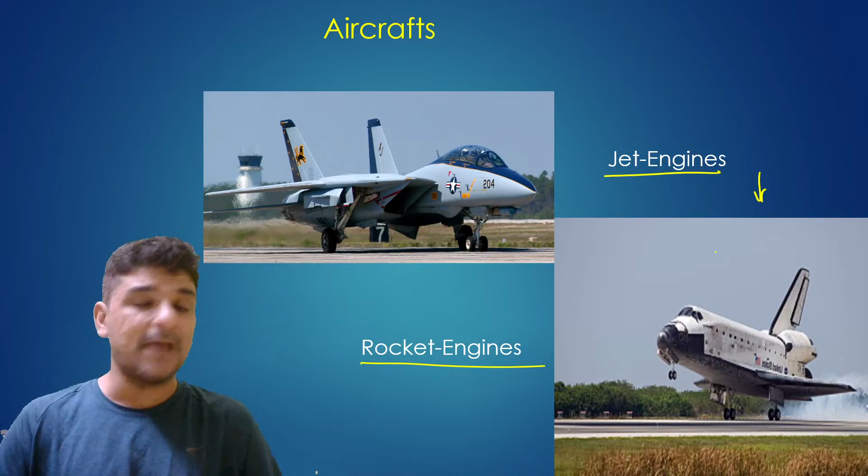Now let's go to the next section, which is why aircraft engines are required. If you have an aircraft, what is the need of an engine, how we actually design these engines, and what are the different components.

First, let's see very basic why the aircraft needs an engine. To understand this, let's take a simple example. Let's say you have a paper boat. I'm sure all of you might have played with this boat when you were young. So if you place this paper boat on water, what will you see?

You will see that when the water is still and you place the boat, it stays at the same location. Now if you want to make this boat move forward, what generally do you do? You push your boat from behind. Let's say you have your hand, and then you push this boat. The moment you push it, the boat moves further. This is a simple example that you might have done.

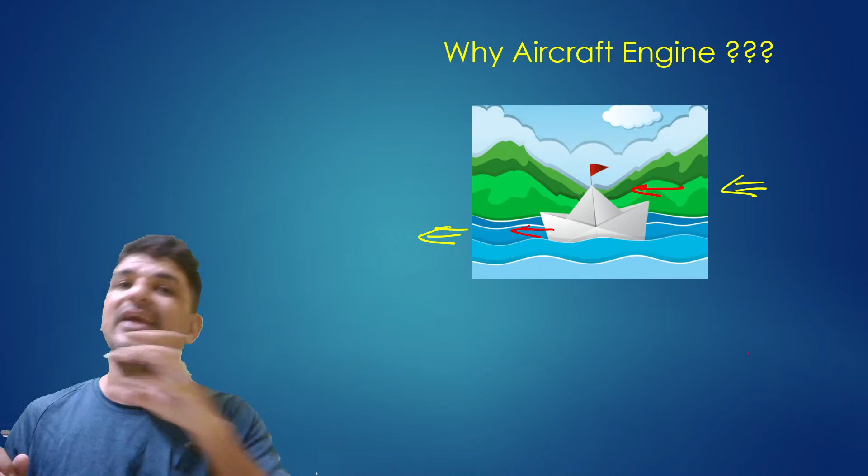So whenever we want to propel this boat forward in the water, what do you do? You apply some force from behind. I'm sure you all are engineering students and have some knowledge about force. Generally, you need some force to move things further.

This can also be understood by another example: there is still water and you put your hand inside it. Now if you want to move your hand forward, what will you do? You have to apply some force on your hand. So generally, to move things through a fluid, we need some force.

I'm sure you've got some idea about force now. So if there is an object that has to be moved through water, or through some other fluid, you have to apply some force on that object. The same principle is used to propel your aircraft.

Let's take another example. Say you have water, and in that water there is a fish standing at one location. Now if the fish has to move through the water, if it wants to go forward, what will it do? It will try to push or propel itself through the water by movement of its tail. This is the tail that is moving.

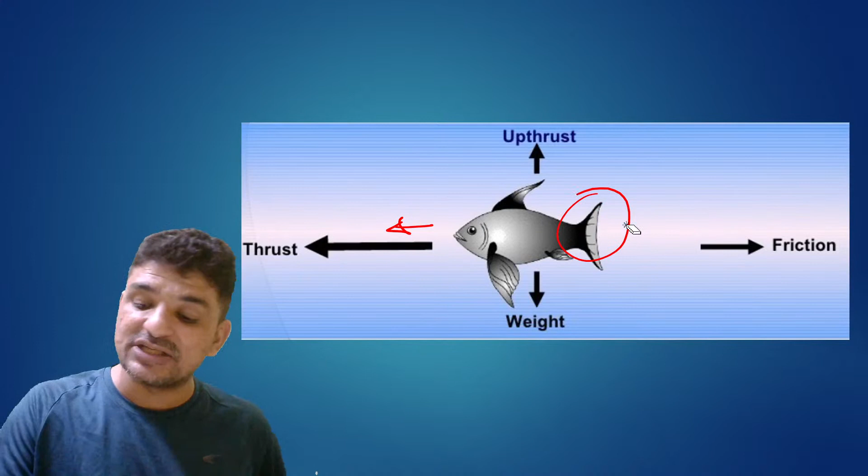So when that tail is moving, it is actually pushing some water behind. Some water is pushed behind, and in that process, some thrust is exerted on the fish so that it moves forward. So whenever a fish is moving, it throws some water behind, and in turn it gets some thrust, and because of that thrust it moves forward.

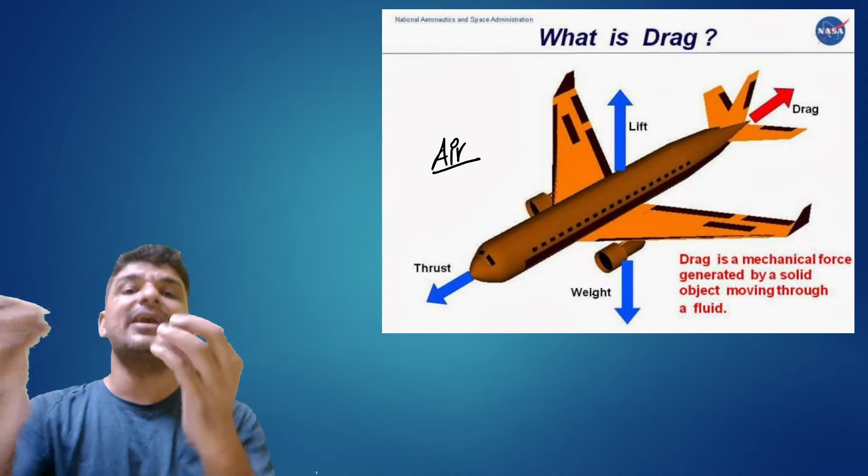The same principle happens with your aircraft as well. If you see a simple aircraft, it's nothing but an object that is moving through one of the fluids. You have air which is present throughout your space. Now your aircraft is moving forward. When the aircraft is moving, it is an object moving through the space or through the atmosphere, so it needs to be applied with some force.

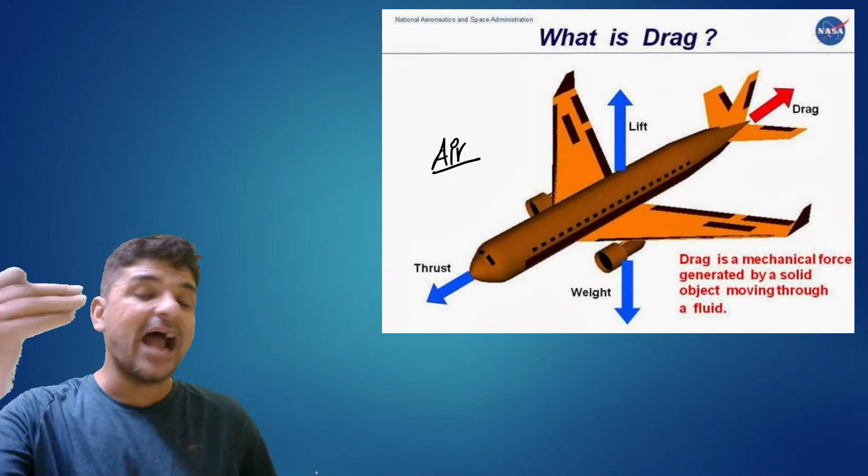That force is nothing but thrust. Why is this thrust required? Because when the object is moving through the fluid, there will be some frictional drag acting on your aircraft, caused by the air. To overcome this drag, we need some force so that the aircraft can move forward.

So this is the basic principle of how an aircraft actually moves forward. You apply some thrust on this object, this plane, and it will move forward. This thrust is used to overcome the frictional drag acting on your aircraft. So guys, this is a very simple principle.

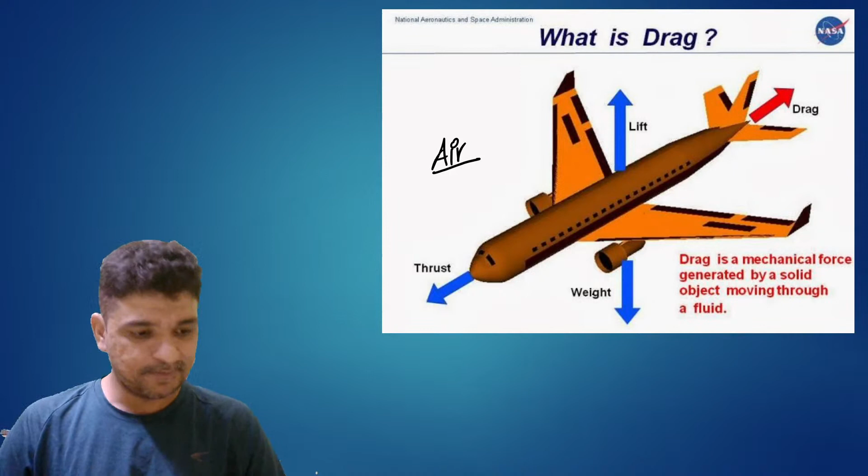Now, how thrust is generated, how engines generate thrust. To understand this simple concept, probably you might have heard Newton's third law: every action has an equal and opposite reaction. So the same principle is used by your aircraft engine as well. So we have your engine - let's say this is one of the engines that you have.

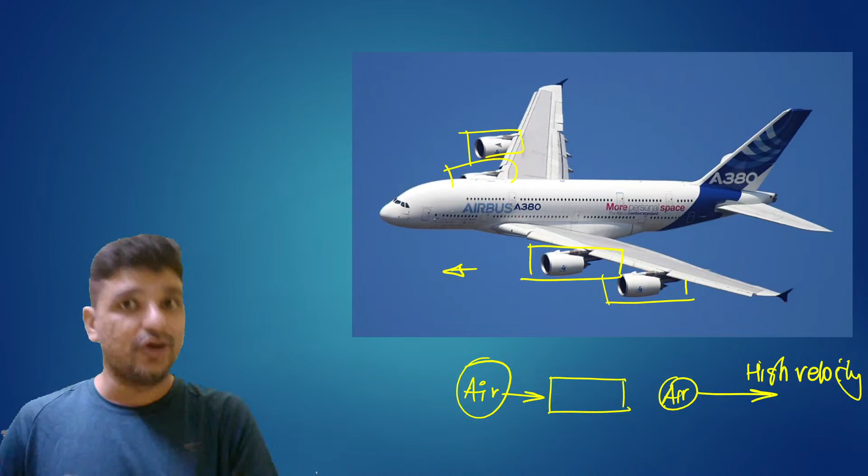This engine is going to take in some air from the front, draw it in, and throw that air out with high velocity. I'm sure you might be aware about Newton's second law and Newton's third law. Whatever is the value of thrust generated - 50 kilonewton, 100 kilonewton, whatever it is - that value is decided by Newton's second law, and the principle of action and reaction is decided by Newton's third law.

So the air, having very low velocity u, roughly around 0, is accelerated while passing through the engine to some very high velocity v. When this air gets pushed towards behind, there was some force applied on this air so that it starts moving backward. That same force was applied by your aircraft engine, and since the air was applied with force, this air in turn is going to apply the same force in the forward direction to your engine. This is how your thrust is actually generated.

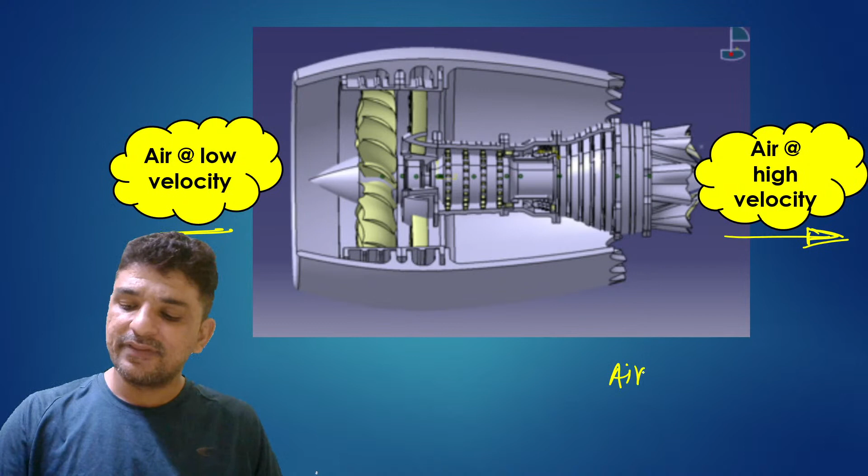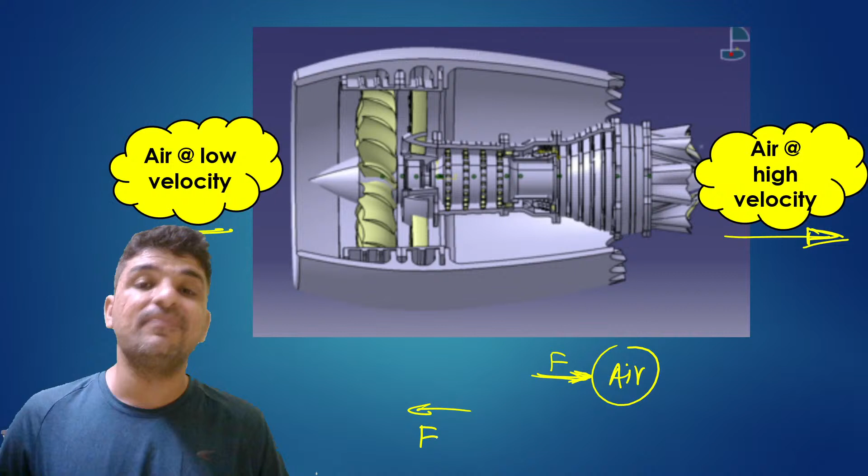If you see your engine, in the front you have air which is at very low velocity. That low velocity air is going to pass through your aircraft engine and come out at very high velocity. So if you see on the air, there was some force applied in this direction, because of which it has got accelerated - that force was applied by your engine. Now from Newton's third law, the action and reaction law - when your air is getting some force from the engine, the engine is also going to get some force from the air, and this force is actually called thrust. This is how thrust is generated by your engine.

Now we are going to see how you actually generate this thrust, and what are the different components present inside your engine, and how we design those components. I have also put up a diagram explaining how the air moves through the engine. We have air in the front coming inside the engine. While passing through, the engine is rotating, and as the air passes through and comes out at very high speeds, thrust is generated.

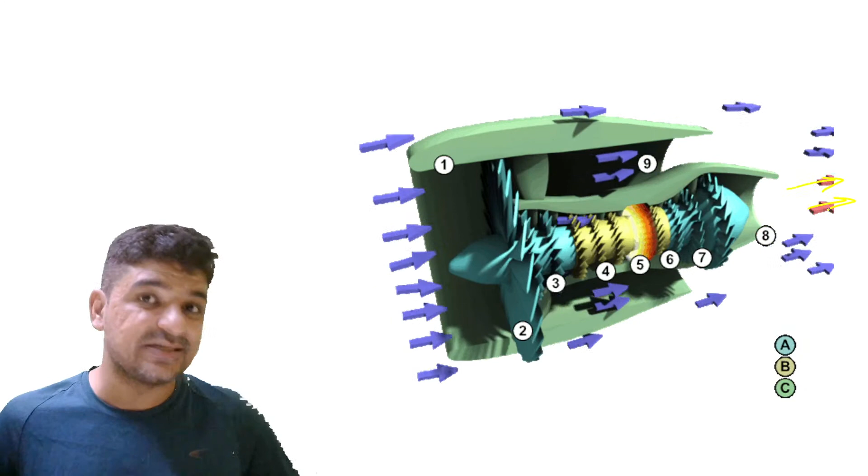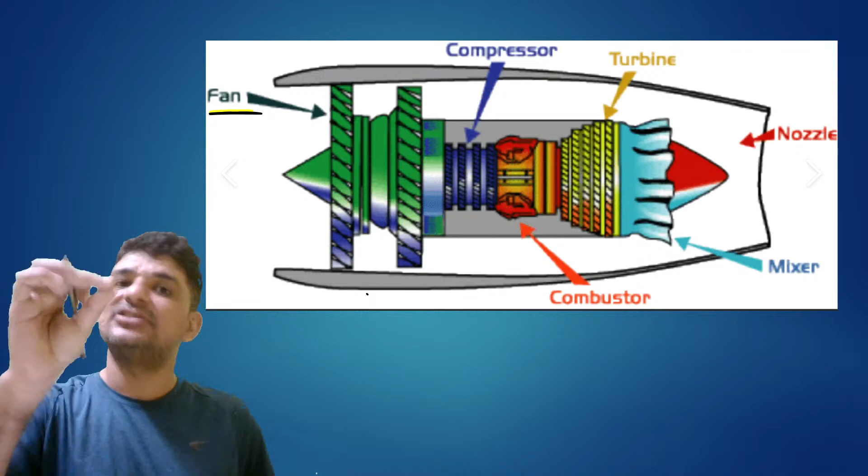Okay guys, moving on, let's take a look at the different components which exist inside the engine and how these components are actually designed. If we see an aircraft engine, probably a jet engine, the components look like this - this is a cross section of the engine. In the engine, we have a fan placed in front, which is used to accelerate the air. The air propelled behind is accelerated by your fan. Then we have the Brayton cycle components - in the Brayton cycle, you might have heard about a compressor that is used to compress and increase the pressure of air.

Then you have a combustor where fuel is supplied and burned, and energy is released. That energy is taken up by the air, increasing its temperature. Once that high temperature, high pressure air passes through the turbine, it expands and does work.

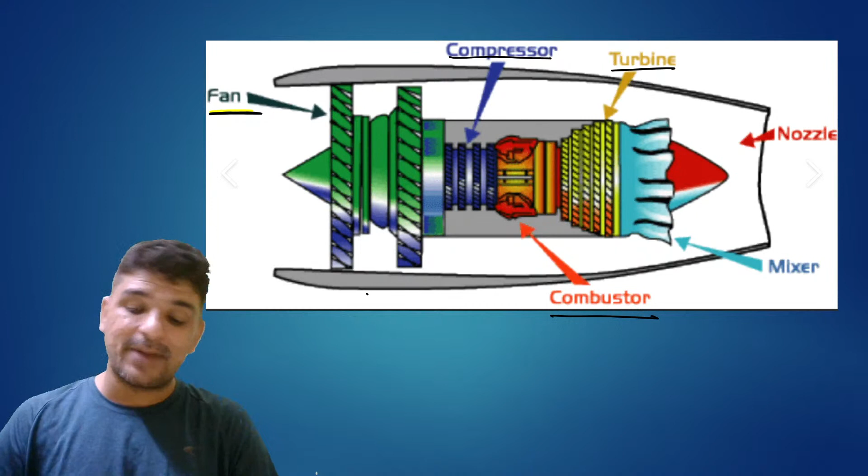The work generated by the turbine is used by the compressor and fan. Whatever work is generated by the turbine, 40 to 50% of that is used by the compressor, and the remaining 50 to 60% is used by the fan.

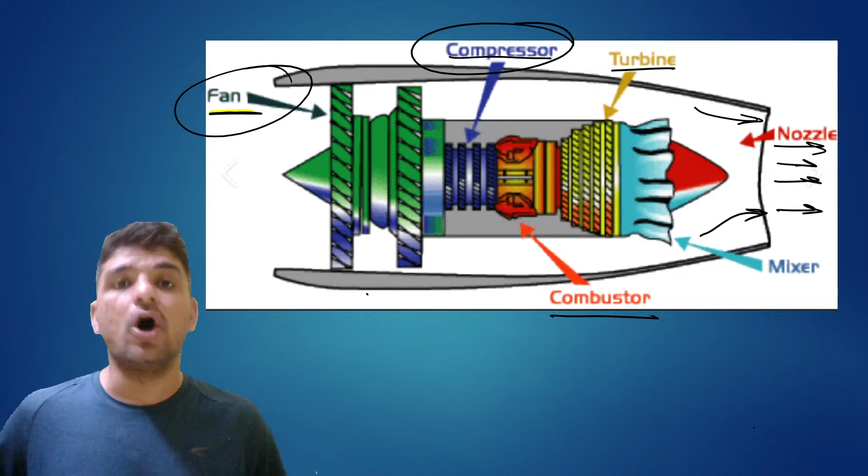Once the air coming out of the nozzle moves backward at high velocity, this is how the actual jet engine or aircraft engine generates thrust. These are the components present inside an aircraft engine.

Now let's go into the detailed design, how actual design happens. If you see the aircraft engine or any engine that goes inside an aircraft, there are certain specifications required for that engine. Engines are actually decided by these specifications, so let's see what specifications are required for an engine.

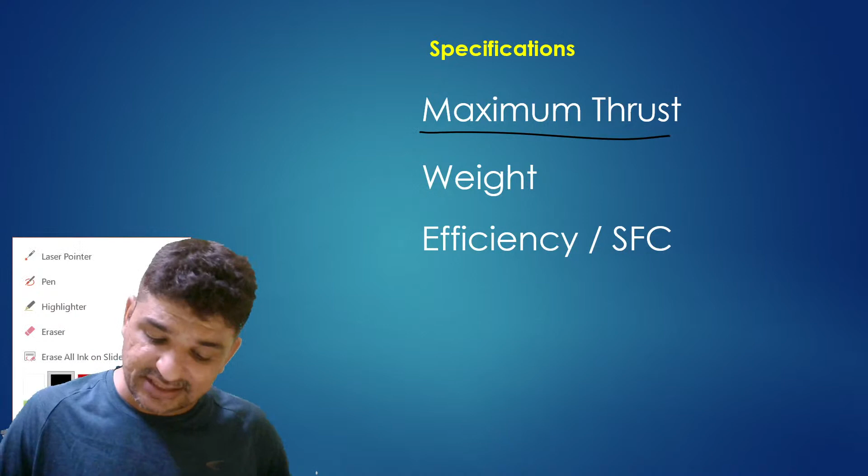The first and foremost, most important specification an aircraft engine needs is the maximum thrust it is going to generate. Based on that thrust, the aircraft is going to move forward. Whenever any engine is fitted on an aircraft, the first and most important criteria is the maximum thrust it will generate. This is the most important criteria which decides your engine.

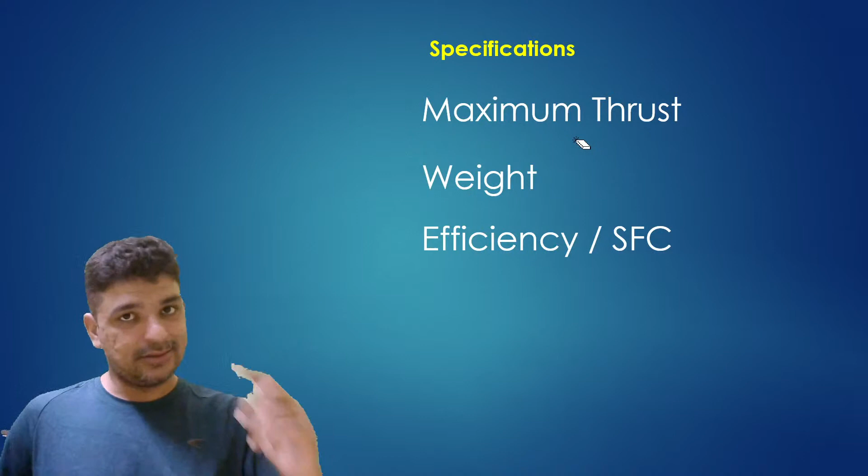Once maximum thrust is decided, there are other parameters that also decide the engine specifications. The second criteria is weight. Weight is again one of the most important criteria for an engine, because aircraft have to fly. You cannot have very heavy engines, because as we increase the weight of the engine, the running cost of the aircraft increases.

The mileage of the aircraft reduces. If you put 1 liter of fuel into the aircraft, it will probably go a lesser distance if it has a very heavyweight engine. So the second most important criteria is weight -- aircraft engines should have the minimum weight as much as possible.

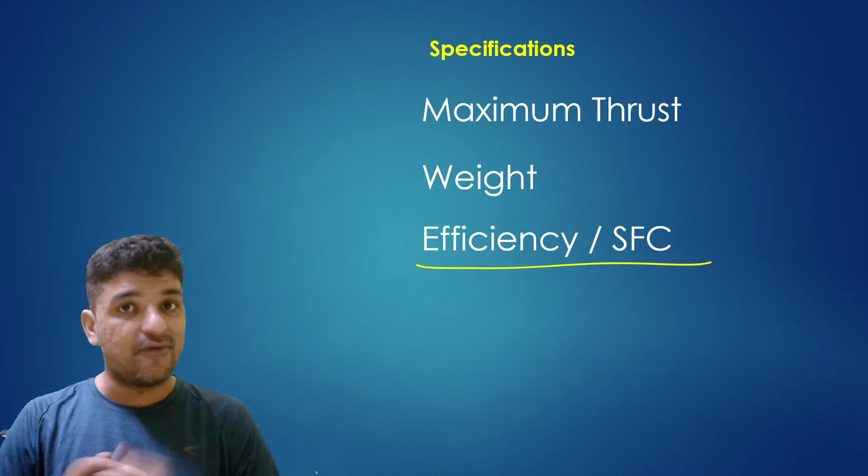The last thing that is again very important is the efficiency or specific fuel consumption. I'm sure you're aware about the efficiency of an aircraft -- if you put in 1 liter or 1 kg of fuel, how much power is generated by the aircraft? That is the measure of efficiency. These are the three main criteria used by aircraft engine designers to design aircraft engines.

Once we've seen all these criteria, let's see how actual engines are designed. Since we have to design aircraft engines, generally whenever a new aircraft is built, let's say by Boeing or Airbus, they have certain specifications for the aircraft, like whether this will be a narrow body aircraft used to carry

passengers from, let's say, Bangalore to Delhi, or from Srinagar to Chennai. That is one type of aircraft, called narrow body aircraft. They have smaller capacity and smaller engines.

Then there is another aircraft that flies from New Delhi to, let's say, Vancouver, Canada, or New Delhi to Paris, Germany, or Britain. Aircraft that carry passengers for very long durations are generally wide body aircraft which travel larger distances. These are the two major classes of aircraft, and for both classes there are different types of engines.

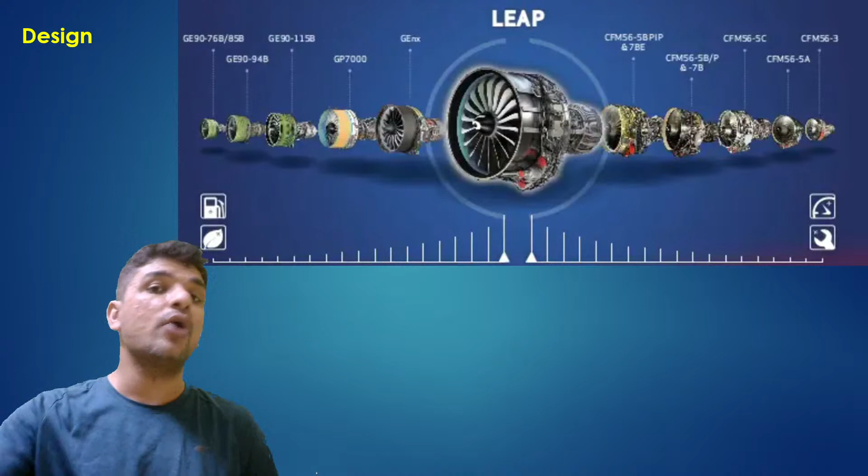Whenever a new engine is being designed to go on a new aircraft, generally the aircraft manufacturers decide the aircraft first, and based on that aircraft, they decide the thrust of the engine that needs to be there. So let's say a new aircraft, the Airbus A320 Neo, is designed by Airbus.

Once the A320 Neo design is finalized by Airbus, they give a specification to engine manufacturers, stating they need an engine that can generate, say, 100 kilonewton of thrust, with weight less than 3 tons and efficiency at a minimum level. So engine manufacturers have to design an engine based on the specification provided by the aircraft manufacturer.

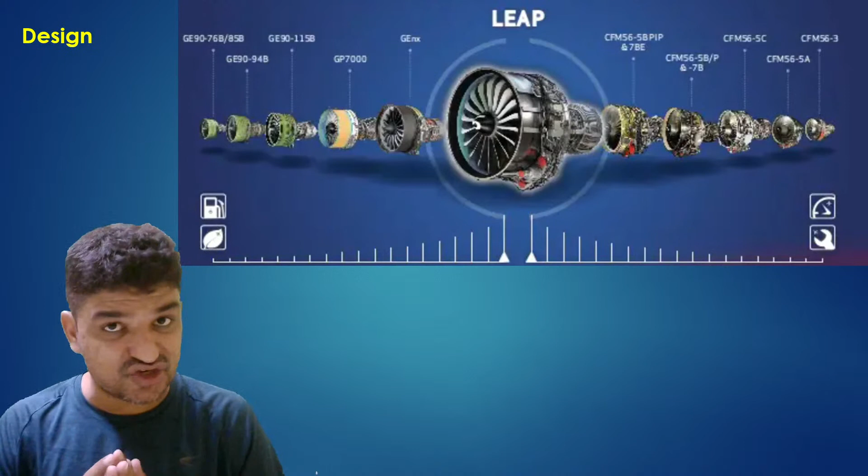Once the engine manufacturers have the specification, say a thrust of 100 kilonewton, what they actually do is look at the leading manufacturers in the world: GE, Rolls-Royce, and Pratt and Whitney. These are some of the most advanced aircraft engine manufacturers, and they have a large fleet of engines already with them.

These engine manufacturers will look at all the engines they already have. If we look at General Electric's class of engines, one of their most successful is the CFM56, fitted on narrow body or smaller duration aircraft. Then they have another class fitted on very large aircraft, the GE90. They also have the GP7000, and they're designing a new engine, the GE9X. So they have a lot of engine classes available — very high thrust, smaller thrust, and some medium thrust in between.

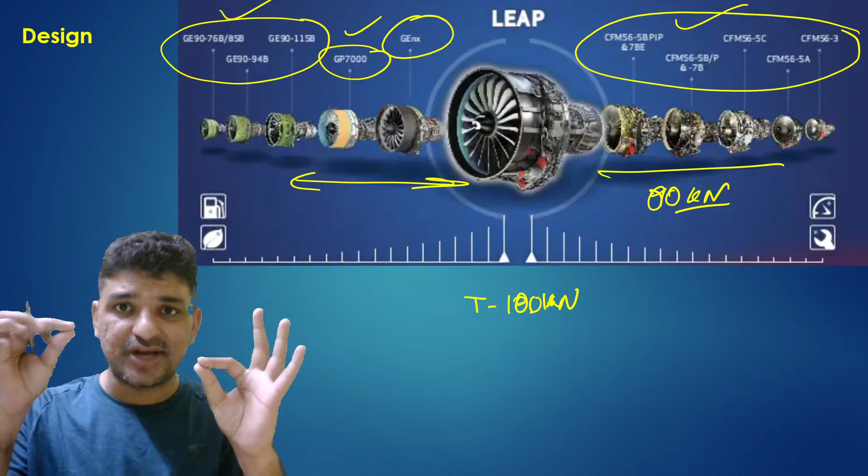Now if they want to design a new engine, what they're going to do is look for one of the similar engines suited for that thrust requirement. If you see the CFM class, the thrust is around 80 to 90 kilonewton, but they have to design an engine with 100 kilonewton thrust. So what they'll do is select one engine, the CFM, as the base engine.

Whenever there's a design of a new engine, none of the companies design an altogether fresh engine from scratch — nobody does that. What engine manufacturers actually do is take one of their successful models and upgrade or rescale it. So if this engine has 80 kilonewton of thrust, they're going to scale it up to make it 100 kilonewton thrust. So they choose the base engine, and once chosen, they optimize or rescale that engine for the new requirement.

So here there are two designs I'm going to compare. This is the CFM engine fleet I was telling you about, and based on this CFM, GE has taken the benefit of CFM along with the benefit of their large engines, clubbed them together, and come up with a new engine called the LEAP engine. This LEAP engine is one of the most efficient engines designed to date for aircraft.

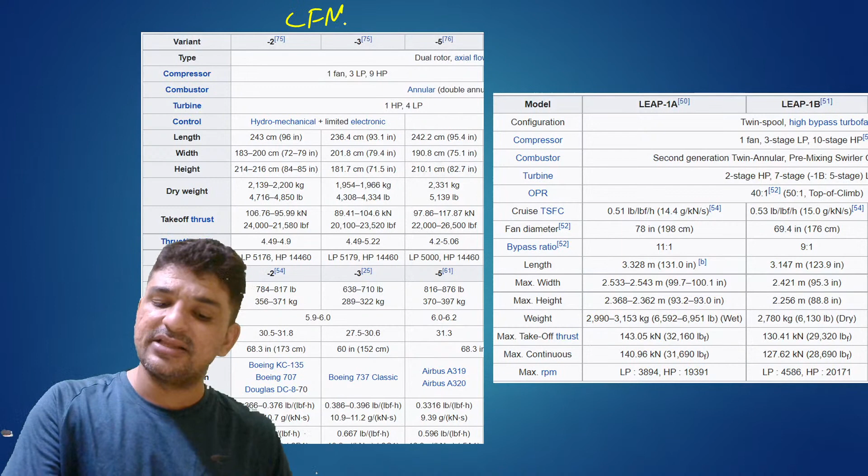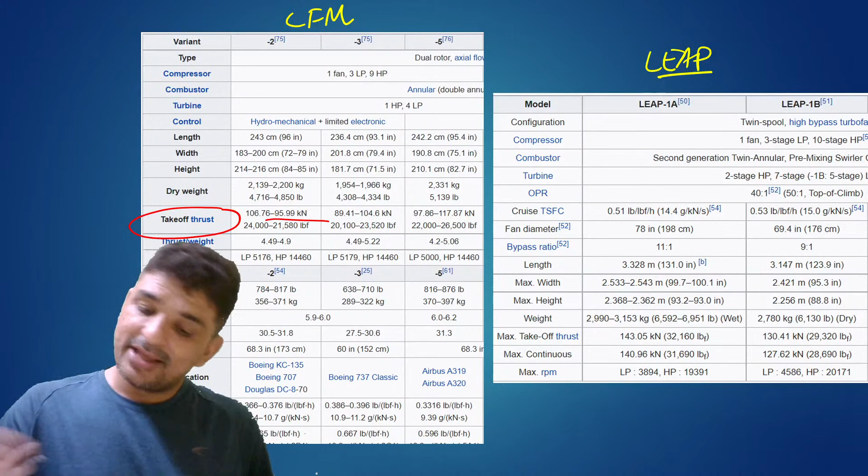Now if you see the comparison of the two engines, on the left hand side is the CFM engine specification, and on the right is the LEAP engine specification. The base specification is the takeoff thrust. The takeoff thrust of CFM was somewhere around 95 to 106 kilonewton. Compared to that, the LEAP engine thrust is slightly higher, somewhere in the range of 130 kilonewton — roughly 20% higher thrust.

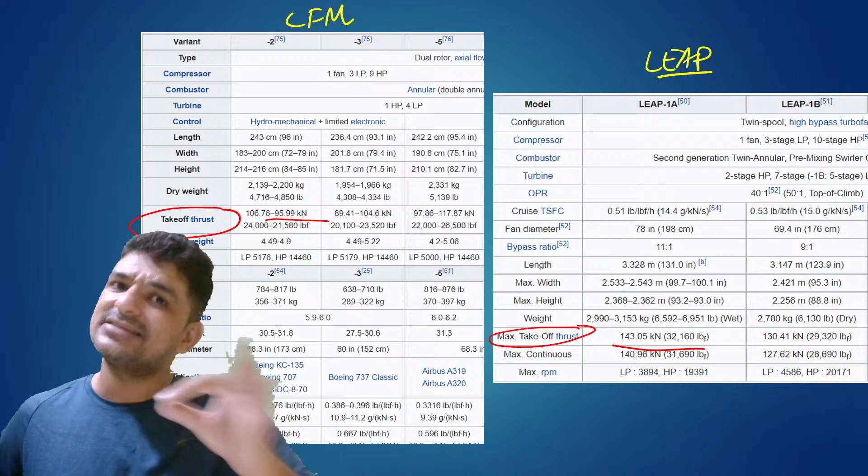Now if you look at the other parameters, they're just a scale up of the CFM. The compressor of the CFM engine has one fan, 3 LP stages, and 9 HP stages. The compressor of the LEAP engine also has one fan and 3 LP stages, but 10 HP stages. Since the LEAP engine has to produce slightly higher thrust, it needed some modifications — so instead of 9 HP stages like the CFM, the LEAP has 10 stages.

Again, if you see the turbine, here it was 1 stage HP and 4 stage LP. That design is slightly modified in case of a LEAP engine. Here we have 2 stage HP and 7 stage LP. So the 1 stage of HP of your CFM is divided into 2 stages of HP, and the 3 or 4 stages of LP have been redesigned into 7 stages to increase the efficiency and to modify some other parameters.

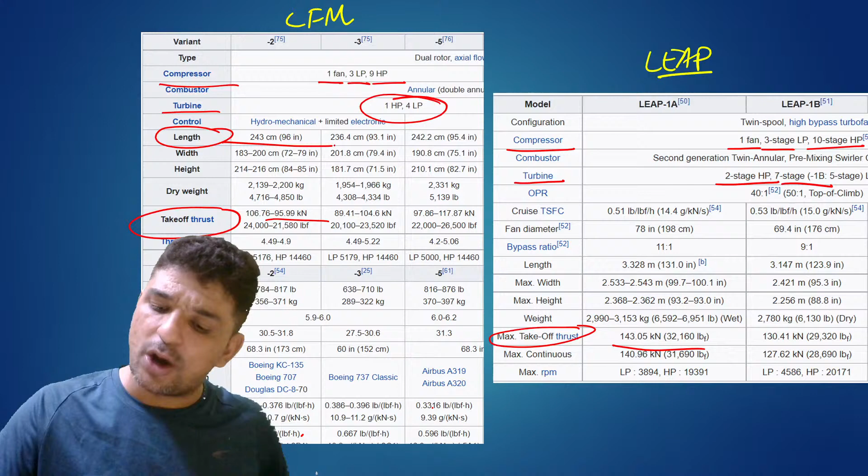Then if you see, the length is most probably almost the same for both engines. The fan diameter over here is around 68 inches. Over here, the fan diameter is somewhere around 78 inches. So this model is nothing but just a scale up of what is already in service, which is CFM, scaled up by around 15 to 20%.

So this is the first process actually done by the manufacturer, and that is to choose the base engine. Once they have the base engine, now they go into the second stage, which is the cycle design. Cycle design is one of the most important stages. So once you have finalized your base engine, which is going to be CFM, now you are going to modify the CFM engine into the LEAP engine. The first important thing that comes is to design the cycle.

How your Brayton cycle is going to look like, and to design the cycle, the path taken up by the manufacturer starts with the first input these manufacturers have, which is the thrust. What is the minimum thrust that this engine is going to have? Once that thrust is finalized, now you go into your designing phase.

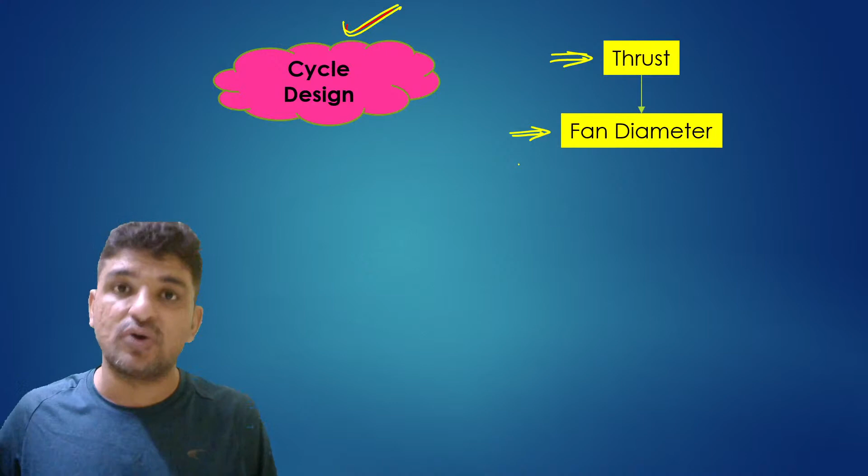So when your thrust is decided, you would produce the thrust with help of your fan. So the moment your thrust is decided, you have to come up with a fan diameter so that you can produce the required amount of thrust. So the first thing that is decided is your fan diameter.

Once the fan diameter is decided, now you go into how much power is required to run this fan, because the fan is going to be run by the turbine. So then you go to the next stage, and that is to design the suitable turbine. If your fan requires, let's say, 100 kilowatts of power, that power is provided by the turbine. Turbine is going to run your fan. So ultimately, you have to design a turbine that produces 100 kilowatts of power.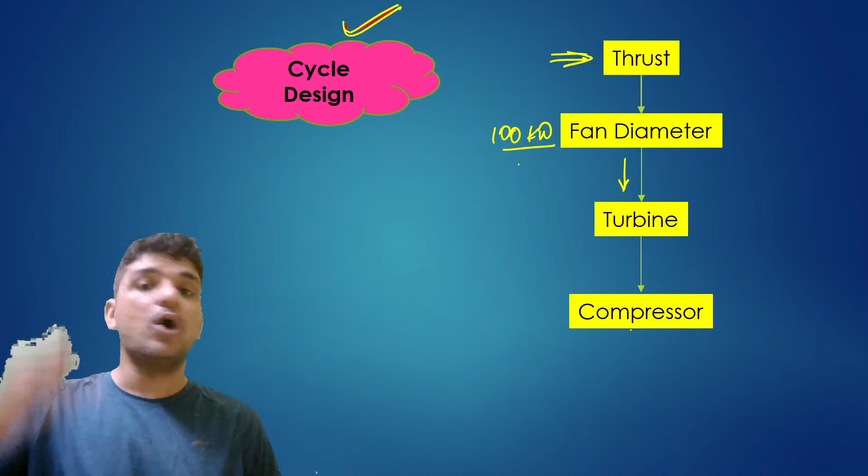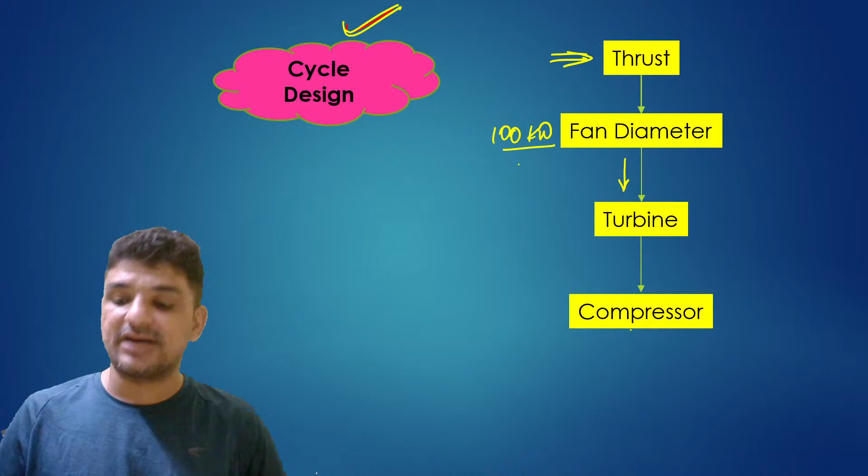Once that turbine is finalized, now you go to the next important component, which is your compressor. We know that the turbine in the Brayton cycle is one of the most important components, and the turbine is going to be run only by the air supplied by your compressor. So you decide the compressor, which is the next component, and once the compressor is decided, then we come to the last thing, that is your combustor, and how much fuel is to be provided to your cycle.

So we have decided the thrust. Let's say there is a thrust of 100 kilonewtons required to be generated. That would be generated by a fan. That fan is going to have, let's say, a diameter of 76 inches. To run that fan, you need a turbine that produces 100 kilowatts of power, and that 100 kilowatts of power will be produced by supplying air through the compressor.

That compressor is going to consume, let's say, 40 kilowatts of power. And this 100 kilowatts of power would be generated when you are supplying the fuel, or supplying the heat, which is, let's say, 200 kilowatts of energy supplied to the combustor. Once all these things are finalized, now you are going to go back to your fan.

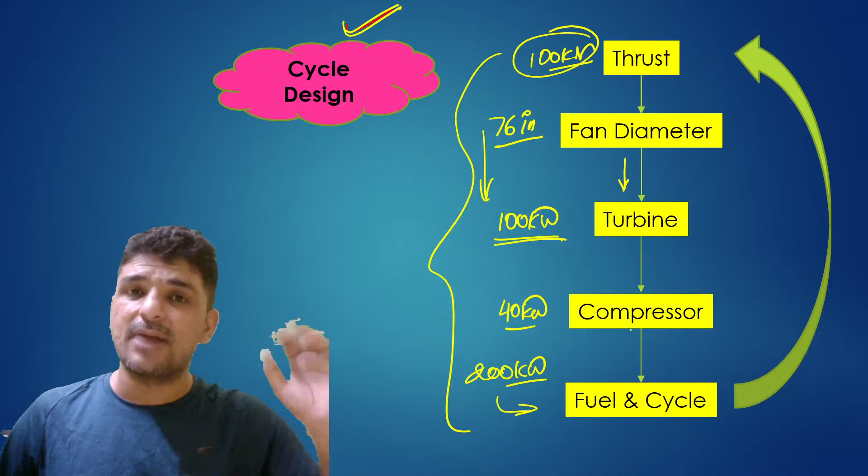Once the cycle is finalized, guys, this is an iterative process. This is not a process that we move in only the downward direction. It is not as simple as it looks, because there are thousands of parameters which change by changing just one small parameter. The moment you change this 100 kilonewton to 101 kilonewton, all the parameters of your turbine, fan, compressor, combustor, everything is going to change. So this is an iterative process.

You have finalized your fan diameter. Once that is finalized, your turbine will be finalized. Turbine is finalized, after that compressor, after that combustor. And once all these are finalized, your cycle is designed.

And now once the cycle is designed, we will go back and try to see how much thrust is generated by your engine. If the thrust generated is more than 100 kilonewton, then we are ready to go for the detailed design. But if the thrust is only, let's say, 98 kilonewton, then you are short of 2 kilonewton.

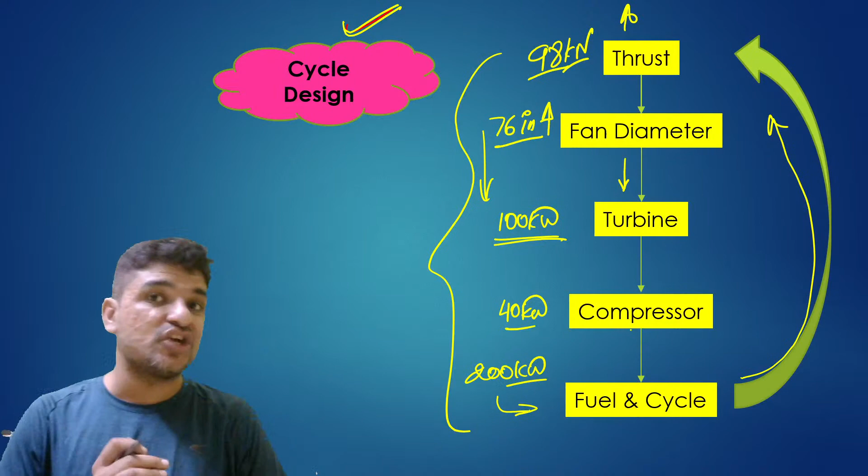So what you should do, the moment you get 98 kilonewton of thrust, you have to increase the dimension of your fan so that you can reach 100. The moment you increase the dimension of your fan, the turbine size is going to increase. Once the turbine size increases, your compressor size increases, and your fuel and cycle parameters change, requiring higher fuel to be supplied. Again you will calculate the thrust, and this goes on till the time you have the required thrust being generated.

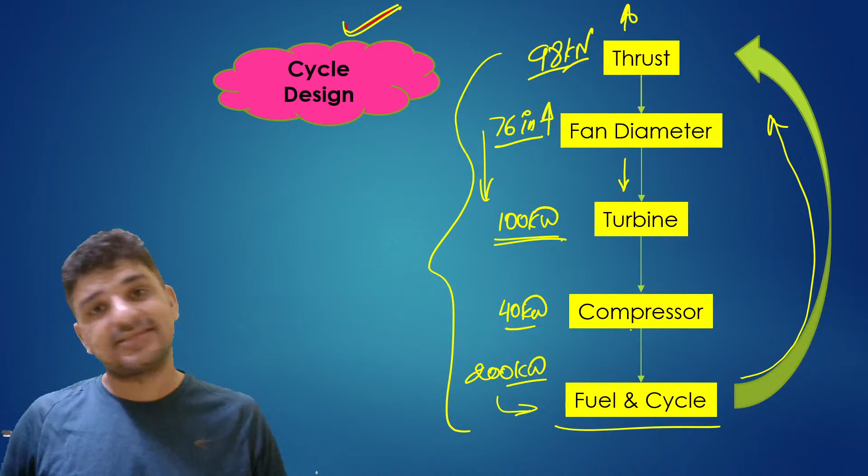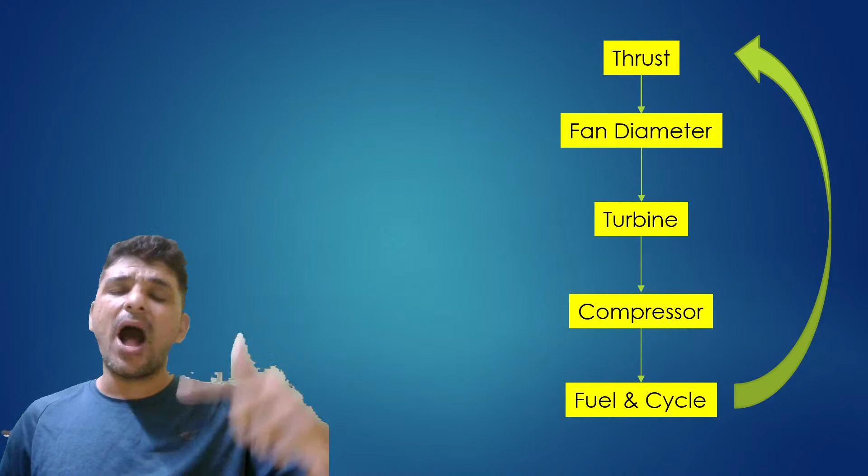Okay, so once the cycle is finalized, you are going to have very specific dimensions which will be fixed for everything. Let's say you have decided there will be a 76-inch diameter fan required to produce that, and 100 kilowatt of turbine power is required.

So your turbine would be delivering 100 kilowatt of power. Then your compressor should be delivering certain air at a given pressure, and your fuel should be supplied accordingly. After that, your cycle is freezed. Once all these parameters are finalized, your cycle would be freezed. So you have a fixed cycle - you have designed a cycle that will be your Brayton cycle.

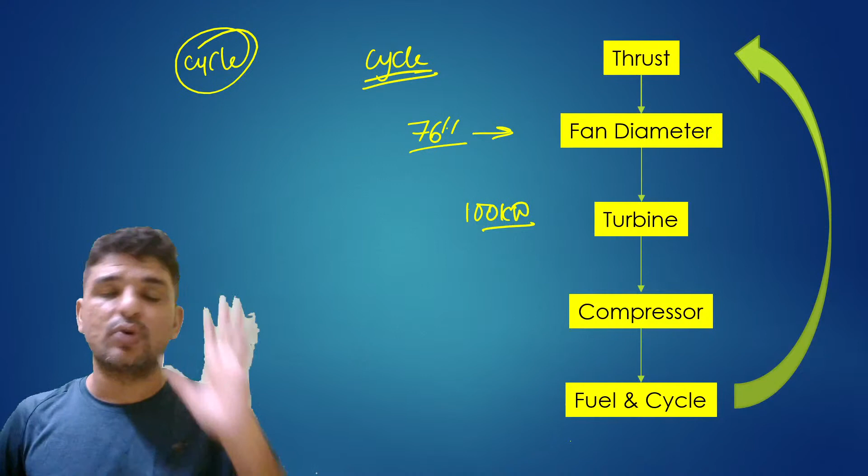In this cycle, what you actually decide is how much air is going to come inside your compressor, which is going to increase its pressure from, let's say, 1 bar to 60 bar. Once that air is coming out of the compressor, it goes inside the combustor. There you supply fuel of, let's say, 5 kg per minute, and then that air moves to the turbine where expansion takes place. Exhaust gases will be coming out at 500 degrees centigrade, and the thrust generated by the fan would be used to propel your aircraft.

So this is the most important part of your engine design - the cycle finalization. Once the cycle is finalized, all these components have specific parameters to deliver.

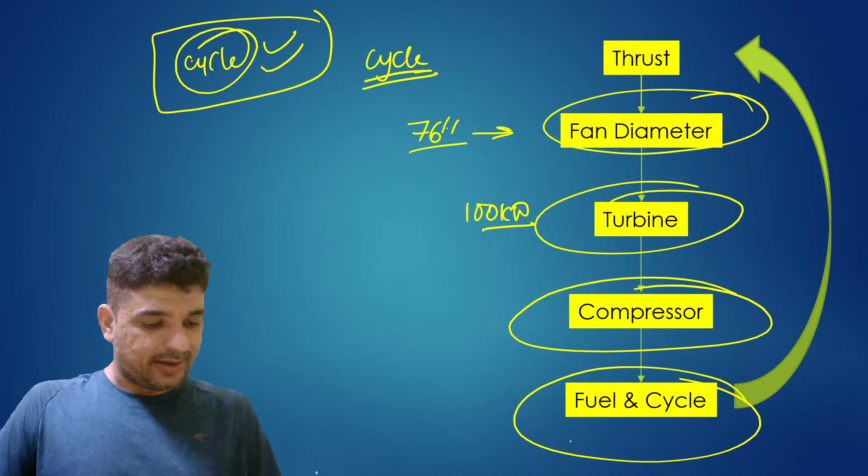Okay, so now guys, let's go into one component at a time. Once the cycle is finalized, now all the single components will be designed. So let's say the first thing that needs to be designed is the fan.

For the fan design, what are the simple inputs that we need to have? We said your fan would be having 76 inches of diameter, so you have one constraint available for your fan - the diameter should be 76 inches. Then you have cycle parameters.

This cycle parameter would tell you how much air will be coming inside your fan, at what velocity it will be coming in, and when it is going out, at what velocity it should go out. Then you will be provided with a torque from the turbine - let's say 100 kilonewton meter of torque would be provided to you. So these are the inputs that are actually given to you.

You will be having some power coming in, there is a constraint on your diameter, and a constraint on the different specifications. Based on these, an engine or fan designer would actually design the fan such that the thrust produced is equal to what is required by the engine aircraft.

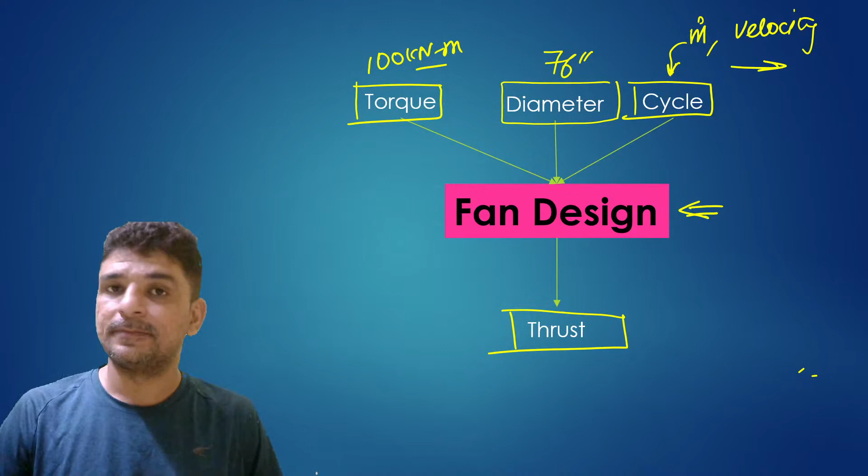How many number of blades are we going to have? So you have certain inputs provided to you, but what are you going to design? You are going to design the number of blades, and the profile of the blade at each location, so that the air coming in is accelerated properly. Once these two things are designed, the number of blades and the profile of your fan.

Once these two things are designed, the fan would go into detailed design. It will pass through some design stages, because once you have designed the fan blade, the number of blades and the profile, now it will undergo stress analysis. When the fan rotates at very high speeds, the centrifugal stresses generated by the fan blade, whether your fan blade would be able to sustain those stresses.

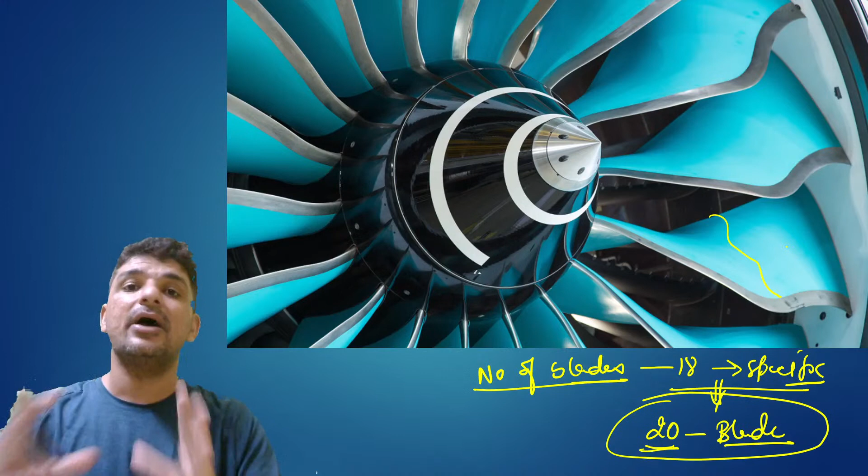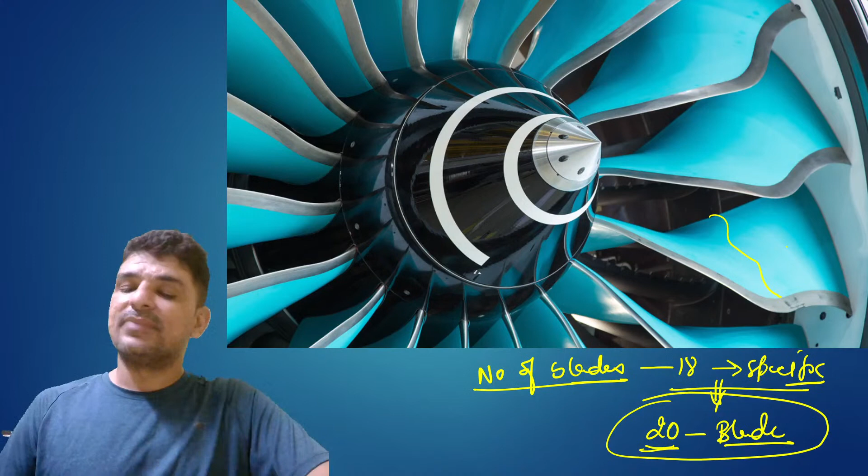There are many analyses which are done similar to this, and once your blade passes through all these analyses, then only your final design would be considered the last. Is it clear? Okay, so this is a brief about how the fan is actually designed.

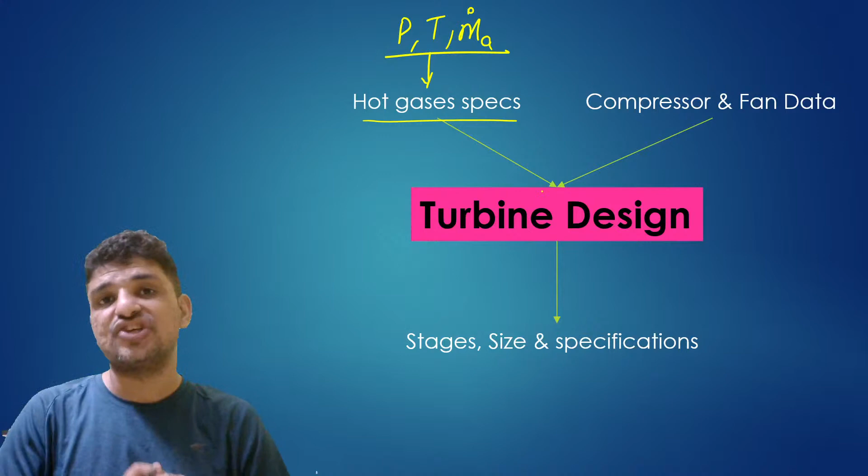Now let's go to the next component, which is your turbine. A turbine designer, when he's going to design his turbine, he is going to have many inputs. The first input would be the hot gases specification: what is the pressure, what is the temperature, what is the amount of air going inside the turbine. So your air comes at 54 bars, 1300 degrees centigrade, and a mass flow rate of 100 kg per second. These specifications a turbine designer would have with him.

He will also have compressor and fan data, because you have to run the fan, so you have a constraint that you need to generate sufficient power to propel your compressor and your fan. Generally, when we consider the fan and compressor data, we decide the speed at which these two devices run, because your fan is designed for one particular speed, your compressor for another. So your turbine should be able to provide power at that particular speed, and you have to design your turbine for that speed.

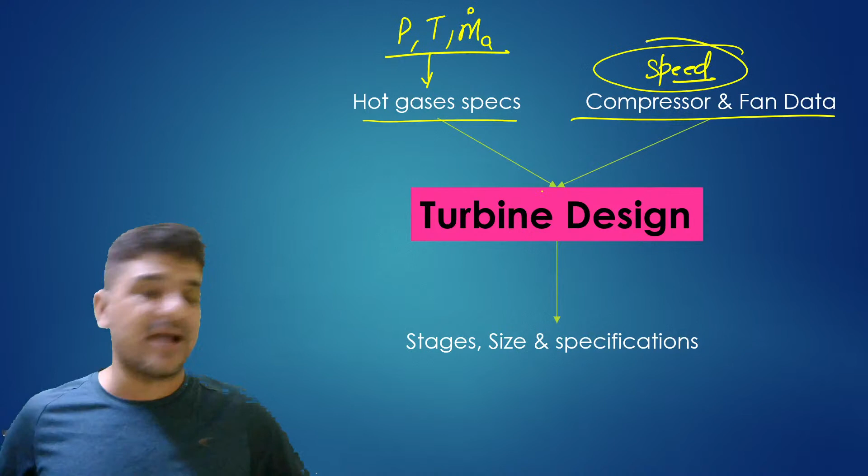We are actually designing the profile. Okay, how does the profile of your stage look like? Because the profile is the one thing that is going to generate the power.

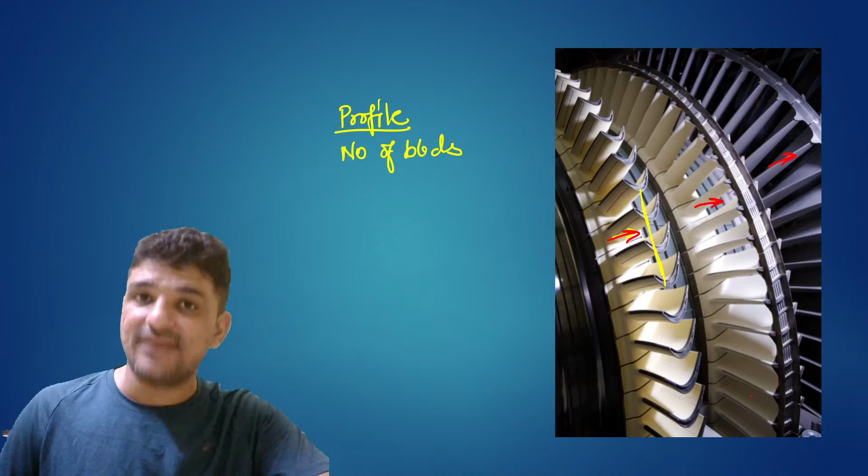Then we are going to decide how many blades are there in each stage. So if you see, these are the blades that are there. Then what will be the other parameters, like the height of the blade, the material of the blade, and others. There are a lot of parameters, like how the cooling of the blade will take place, how the heat transfer will be happening, how the air would be moving. All these parameters will be decided by the turbine designer.

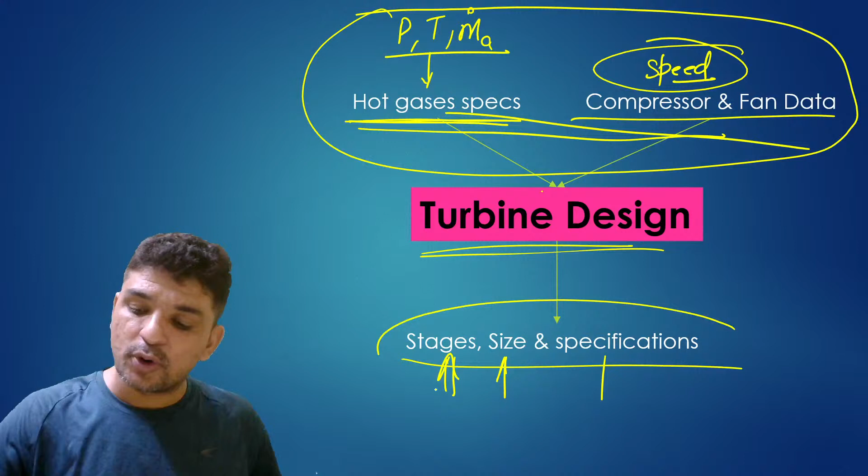Once you have designed the turbine, now you will see whether the turbine designed by you, if provided with these specifications, is going to produce the same thrust or power required by the compressor and fan at the given speed. Once that is decided, your turbine is finalized. When your turbine is finalized, now we will go to the next component, which is your compressor design.

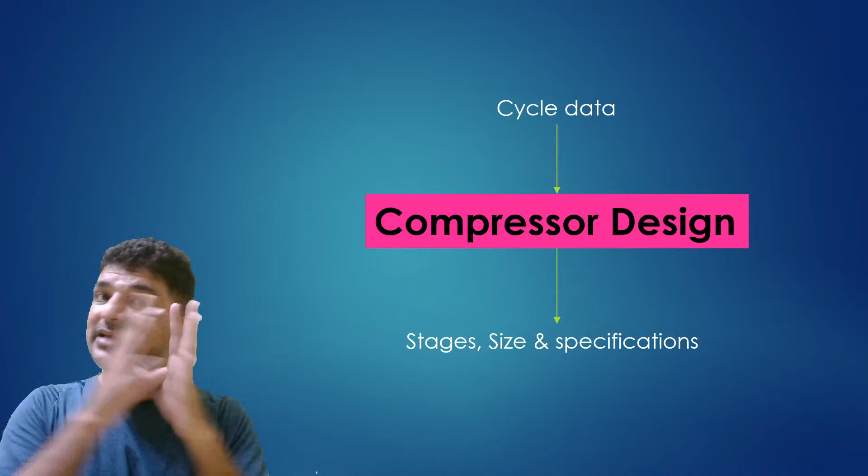If you see, all these things are going in parallel. So a fan designer would have input from the cycle, a turbine designer would have input from the cycle, a compressor designer would have input from the cycle, a combustor designer also has input from the cycle, and they are all designing in parallel. So for the compressor design, you have the cycle data.

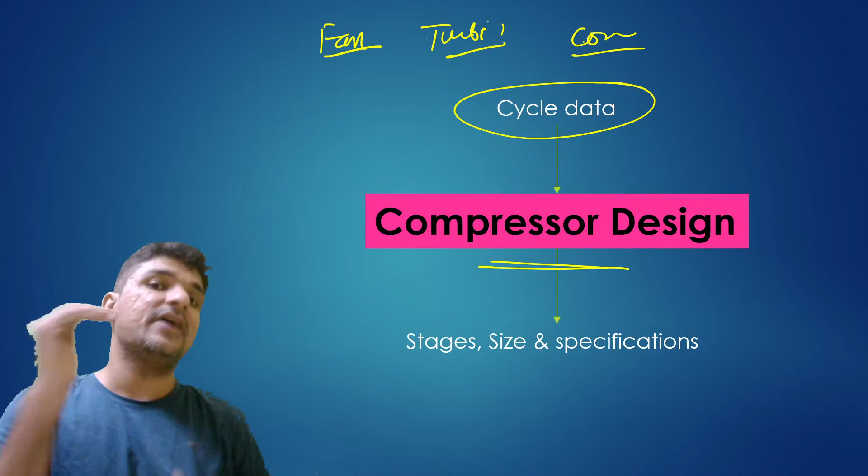For the compressor, the required cycle data is the amount of air going inside, and the pressure increase it has to achieve. So the compressor has to develop a pressure of, let's say, 60 bar. So to develop that pressure, what should be the design of your air compressor? Based on that, if you see the aircraft compressor, they look like this.

The aircraft engine compressors have multiple stages. I have already told you the LEAP engine had 3 plus 10 — 3 LP stages and 10 HP stages. Based on these, now your compressor is designed.

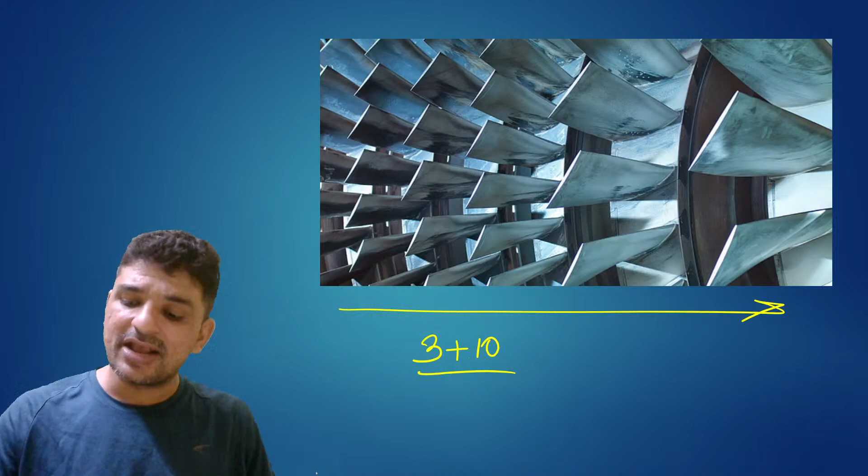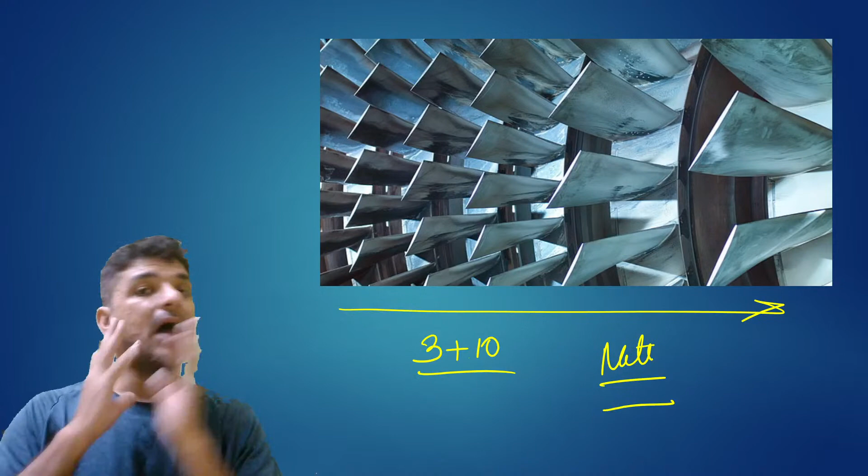Each stage would have its specification, like the material of your blade, the height of your compressor blade, the profile of your compressor blade, the different stresses that will be coming up, and how the heat transfer will be happening. All these things are taken care of by all the component designers.

Yes, they use a lot of software for iterations. These simulations are actually done on advanced software that these companies generally have. They have software for all the analysis, like heat transfer analysis. They have software for stress analysis — most stress analysis nowadays is done in ANSYS. There are other software too, like cycle software.

Cycle software are their in-house built tools. We don't generally have readily available ones, because all companies have different designs, and based on those designs they develop software which will generally design the cycle.

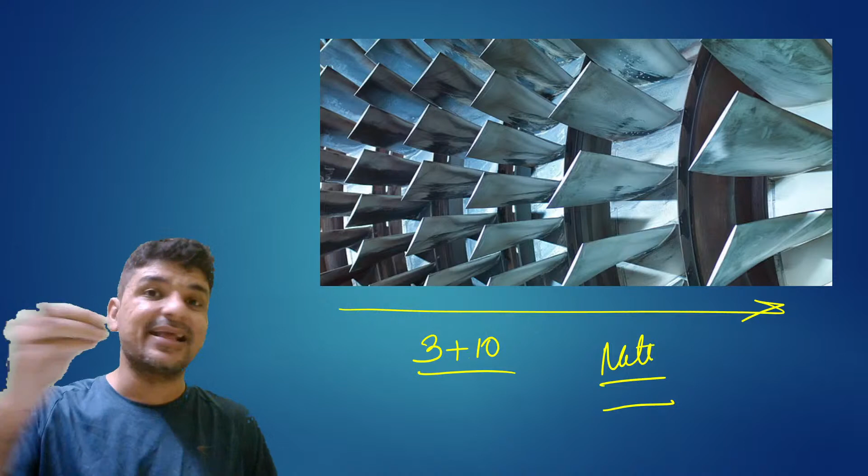Also for the fan there are going to be a lot of software. The fan will have stress analysis as well, and will undergo vibration analysis. The fan will also undergo blade liberation simulations — if there is a crack in the blade, that blade gets liberated, and the impact of that liberation on the engine is also analyzed by the engine designers. So there are a lot of things that actually go into the design.

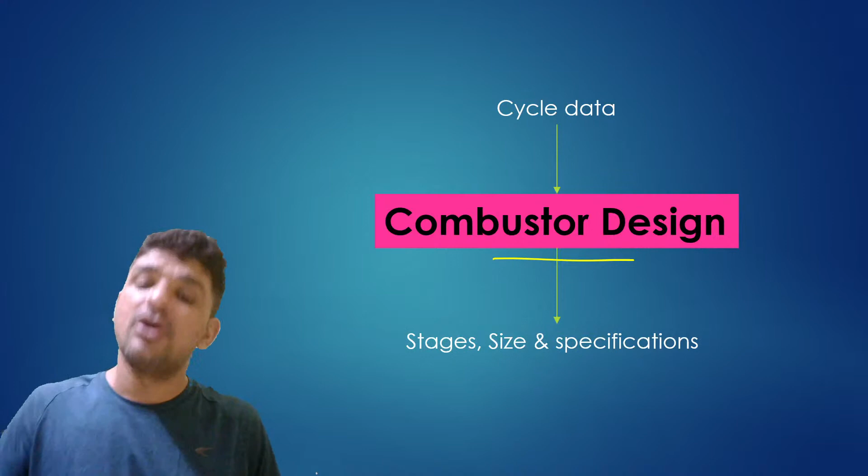Similarly we go to the last component, which is the combustor. Once you have finalized the amount of air coming into the compressor that is going to go inside the combustor, you decide how much fuel is going to go inside your combustor. Once you have fuel going in and air going in, now you have to design a combustor.

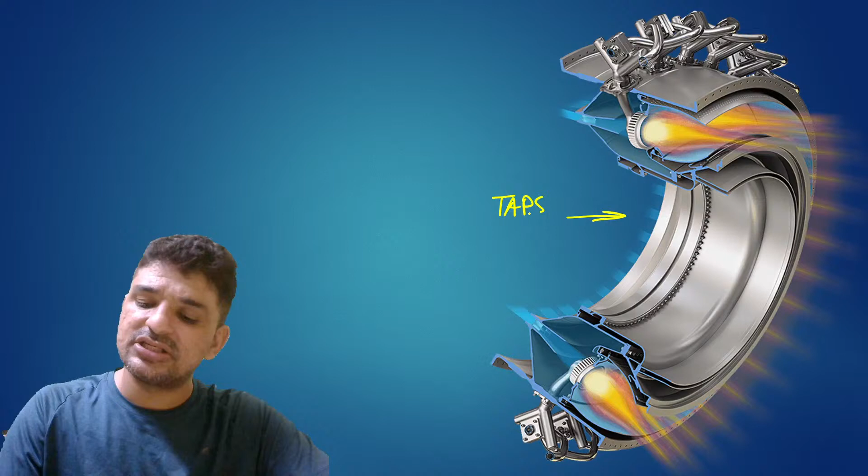That I have actually shown you. This is the TAPS combustor — twin annular premixing swirler. So this is what the combustor actually looks like. Fuel comes from here and the air comes from here.

Both of these are burned inside this combustor. The combustion process generates very high temperatures, and due to these high temperatures, the liner present over there, which is the combustor wall that we actually see, will face extreme conditions. At these extreme temperatures, the combustor material might fail. This is one of the most extreme conditions under which the combustor is designed, so a combustor engineer must take into account all these temperatures, how the heat is being released, and how the component is not going to fail.

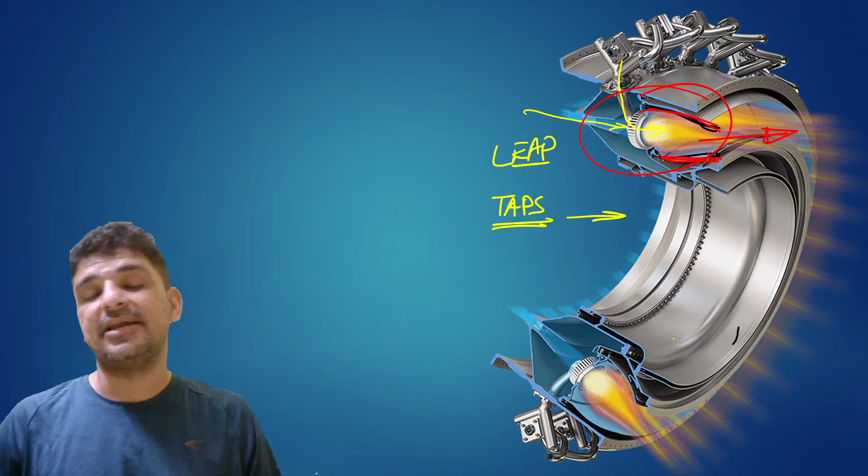Once these components are designed, you have air that will be coming out at certain temperatures. So you have your air coming out at 54 bar and 1300 degrees centigrade, as expected from you by your cycle. We said that the turbine is going to have air coming at 54 bar and 1300 degrees centigrade, and whether you can provide those conditions is the question.

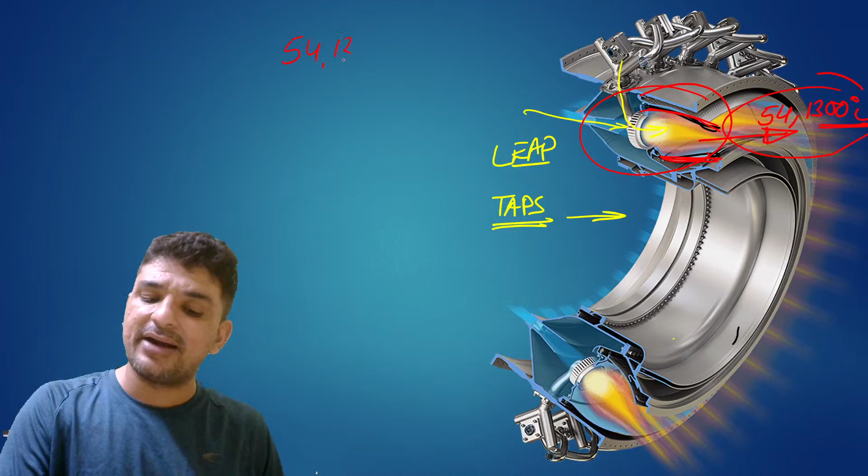If you are not able to meet these conditions like 54 bar and 1300 degrees centigrade, let's say the temperature the air is having is only 1278 degrees centigrade, then you have to redesign your combustor so that it reaches these conditions. Because if you don't have these conditions, your turbine is not going to generate the power that is required by your fan. If the turbine is not going to generate it, your fan is not going to generate thrust, and if the thrust is not generated, your aircraft is not going to move at the speed at which it is required.

If you decided that you will be starting from Delhi at 1 o'clock and reaching Bangalore by 4 o'clock, then at 4 o'clock you will not be able to reach, you will reach at 5 o'clock. So the thrust generated by your engine will be less, and your aircraft will be moving at a lower speed. It might also happen that your aircraft might not even take off if the thrust is not generated properly.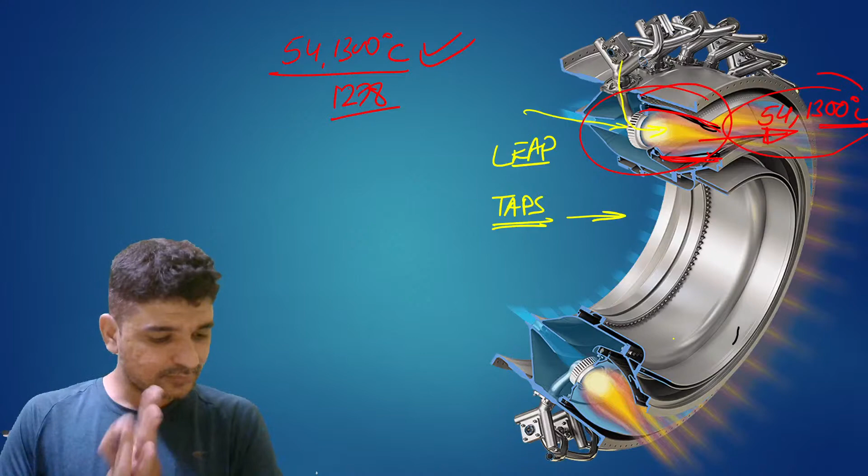Once all these different components are designed, like the fan, the turbine, the compressor, and the combustor, theoretically everything has been designed, but still your engine is not competent enough to be supplied to aircraft manufacturers. So there is going to come a very important stage, and that is the testing of engines.

We are going to test the engines in real life. We will make the engine. This is a test rig which is built for engine testing. We make many engines, like 20 to 30 engines, and those engines will be used for testing. You have an engine installed on a test rig, and now your engine would be run.

If your engine is run, you are going to supply fuel to the engine as if it is installed on your aircraft, and you are going to run it through your cycle. When you run the engine, you will have certain parameters on which that engine will be running, and now your engine is going to produce thrust. That thrust is measured by the test rig, and if that thrust is 100 kilonewton, then your engine has met one of the criteria, that it produces the required amount of thrust.

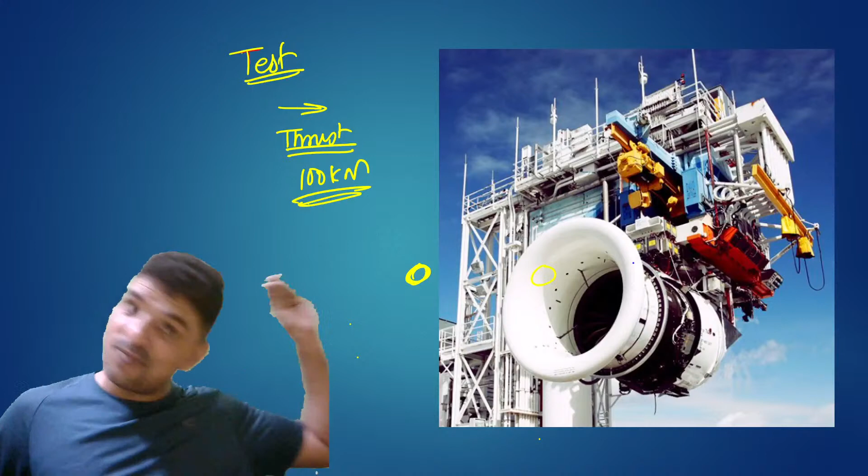There will be a bird strike test on this engine. There will be a live bird, sort of, which will be thrown inside the engine, and it will be seen whether this engine sustains that bird strike or not.

Okay, there is also one test which is done for the fan blade liberation. So you have a fan blade, as I have shown you. Okay, so this is the fan blade.

There is one specific requirement by FAA, the authorizing authority in the USA. So they have one specific test. What you generally do is release one of the blades from here. While the engine is running at full speed, 4,000 RPM, you release one of the blades. How do we release it?

We actually put some explosive over here and we trigger that explosive. That explosive makes the blade crack, and once that blade is released, it will be seen whether the engine cowl present over here, this outside engine cowl, can capture the blade. The blade should not go out of the engine.

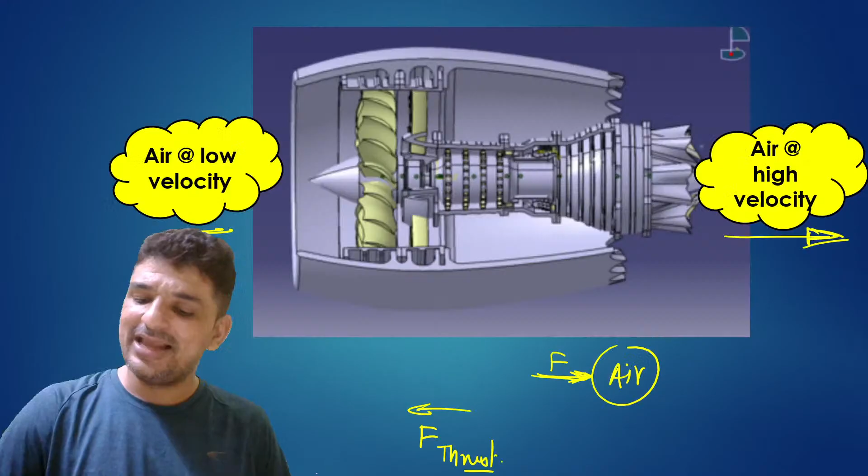Why? Because let's assume that you are sitting in your aircraft. Let's say I give you a very interesting scenario. You have your aircraft, you are sitting over here, flying in this aircraft. Let's say you were sitting in an Airbus A380. There was one blade released from here. This released blade can go and pierce the nacelle of the aircraft.

When that blade is released, it is going to strike. It can go and strike the aircraft over here, and if that happens, your aircraft is going to fail and this whole aircraft is going to go down. So there is a very specific requirement that if the blade is released while your engine is running, your engine should be designed such that it can contain that blade. That blade should not go and strike the nacelle of the aircraft or the fuselage that we actually see. Only if that is happening would your engine be certified.

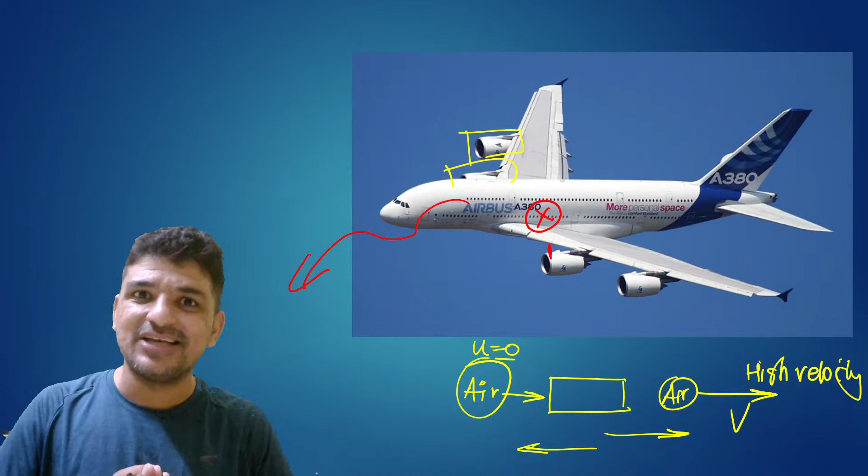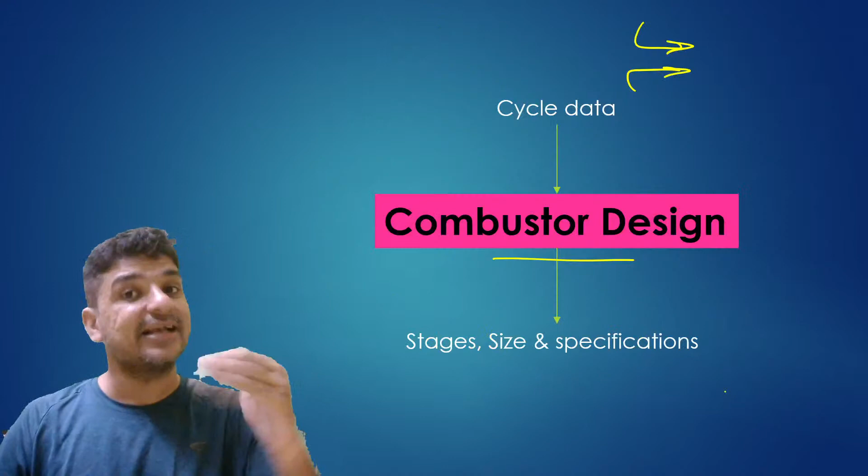In actual conditions, the engine that we are going to test would be shredded. The engine in which you are going to see the fan blade release test, that is going to go to pieces. This is one of the tests. Under all these extreme conditions, your engine would be tested. And if everything is fine, then only your design would be certified by the FAA.

Once certified, your engine can go into production and be handed over to the aircraft manufacturers. If you are running your aircraft engine and find that the thrust generated is less than required, let's say your engine was supposed to generate 100 kilonewton but on the test bed it is not generating 100 kilonewton, then you have to redesign your engine.

Again, the process starts from the designing of the fan. If this thrust is not generated, you have to go for a 77 inch fan. And if you go for a 77 inch fan, everything is going to change. Mass flow rate is going to change, the fan diameter changes, so its profile will change. Once the profile changes, the mass of the fan blade increases.

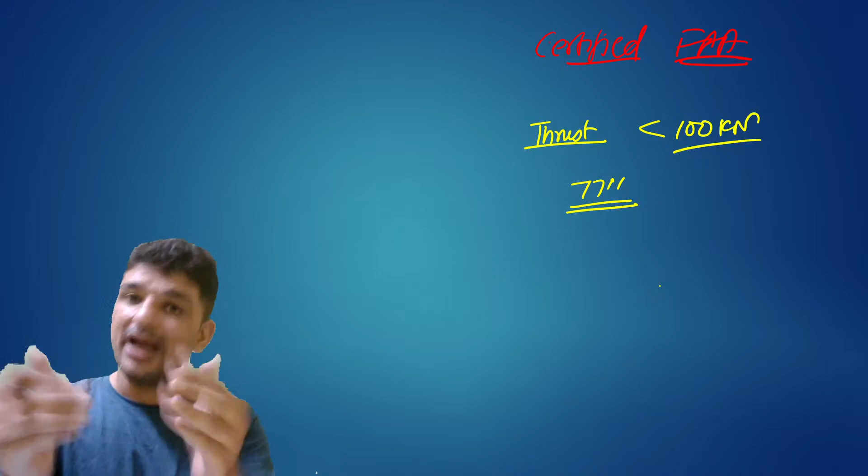Again you have to go for the stress analysis. Once the stress analysis is okay, then you go for other analysis. You will again go on this engine for the fan blade release test.

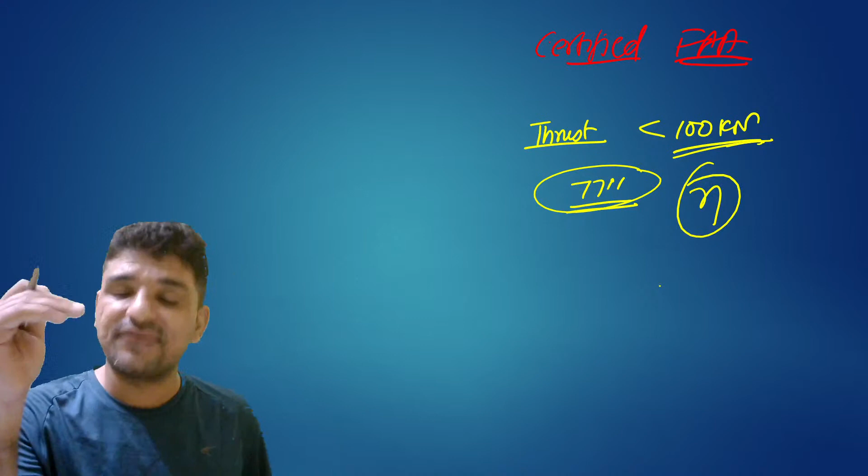If let's say the thrust generated is okay, 100 kilonewton, but the efficiency is not good - we said there are three main parameters used in the design of an aircraft engine: thrust, weight, and efficiency. All three criteria should be met, then only your engine would be installed on an aircraft.

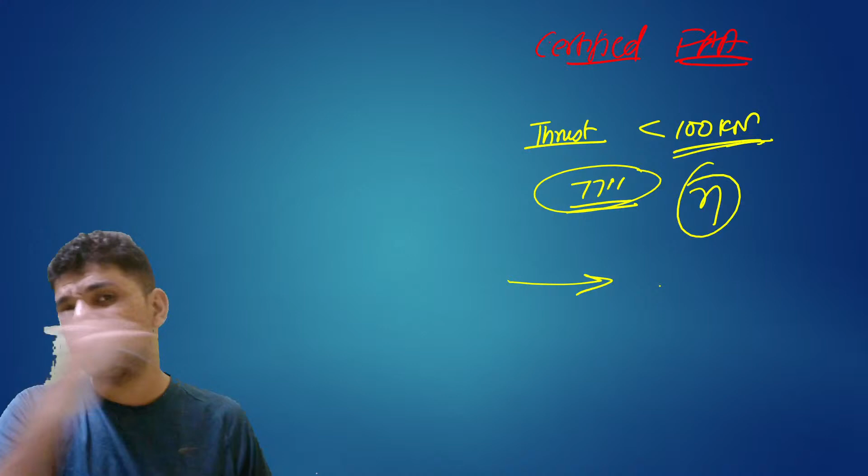If the weight is larger, you have to reduce the weight. If the efficiency is less, you have to improve the efficiency. And for all these, iterations will again take place - your turbine is going to be redesigned, compressor is going to be redesigned, combustor is going to be redesigned, fan altogether redesigned. All the components can be scaled up or scaled down. This is how an actual engine is designed.

I'm sure, guys, you must have got some idea on how the engine is designed. Is it clear to everyone? Now I can take some of your questions which you have asked.

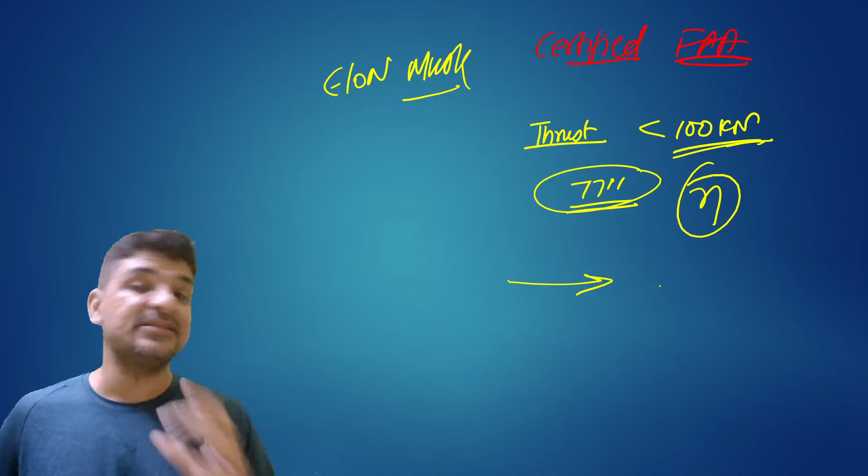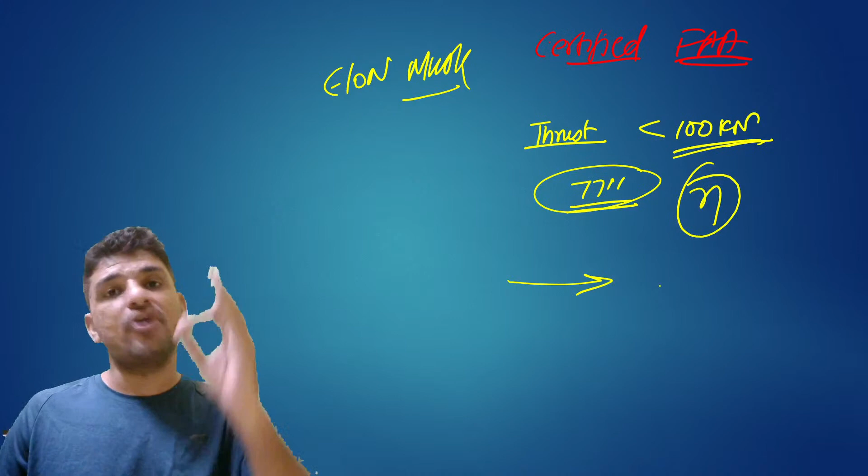So Amrit, you are saying this is very dangerous work. Yes, it's really dangerous - testing of these engines is really dangerous. If you might have heard of Elon Musk, SpaceX is in this phase, they are testing some of their vehicles. You might have seen that a lot of vehicles are failing on the test bed. That is what actually happens while we are testing these engines. There are many failures, and once those failures occur, we redesign our aircraft engines, and only then we put these engines into service. After undergoing so many tests, then only your engines are certified, then only your aircrafts are certified, and because of this reason, the number of accidents you see in aircraft engines or aircrafts is very, very small. Compared to all other modes of transport, aircrafts are the safest mode of transport.